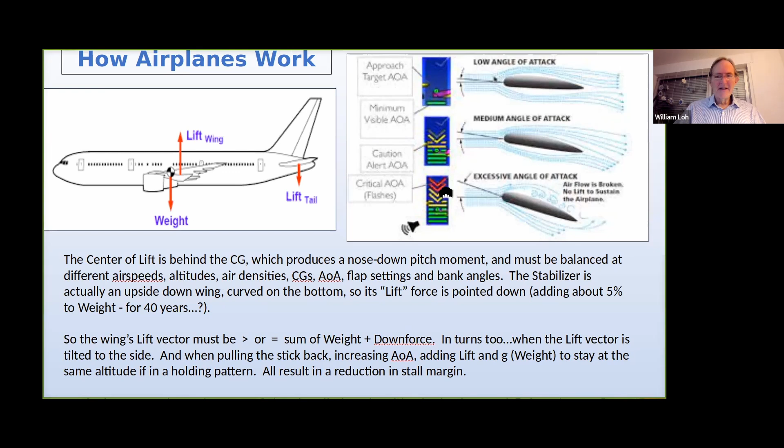So here, you can see this is a 787. You can see the angle of the stabilizer. So the leading edge is down compared to the back edge, the trailing edge. So that means it has a negative angle of attack. And that means this lift vector is a function of that.

All airplanes hit turbulence. And if that makes the nose go down, this stabilizer downforce right here, if you imagine that airplane, so the nose goes down like that, the tail goes higher, that negative angle of attack gets bigger, and this lift vector gets bigger too, and it makes the nose go back up again, just by the design of the airplane.

Same thing, if you hit turbulence and the nose goes up, imagine that airplane again going like this, nose is up, tail is down, and it kind of squishes this lift vector because the angle of attack is less for the stabilizer and pushes the nose back down again. Also due to this situation here still. And that's why they do that.

You know, they could have the center of lift be right above the center of gravity. But this imbalance here makes the airplane more stable. And that's why they have the stabilizer too. So this stuff happens all by itself. It's called passive dynamic longitudinal stability. This is the longitudinal axis. Passive means the pilots are just sitting up there. They don't have to do anything.

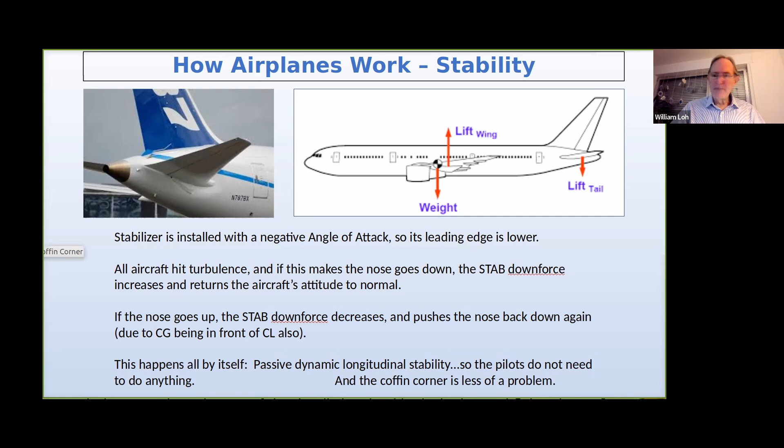Here it is. Can you see that good? Mine's, yeah, a little bit off on top here. Is that okay? Oh yeah, it is a little bit cut off on top, but yeah, the rest. Sorry about that. All good.

So the last time you went on an airplane and you were halfway through the flight, that means you're at your cruising altitude. You're just a couple of knots away from going too slow and stalling, and a couple of knots away from going too fast and overspeeding the airplane. Then it has to get inspected when you land. So it's a big deal.

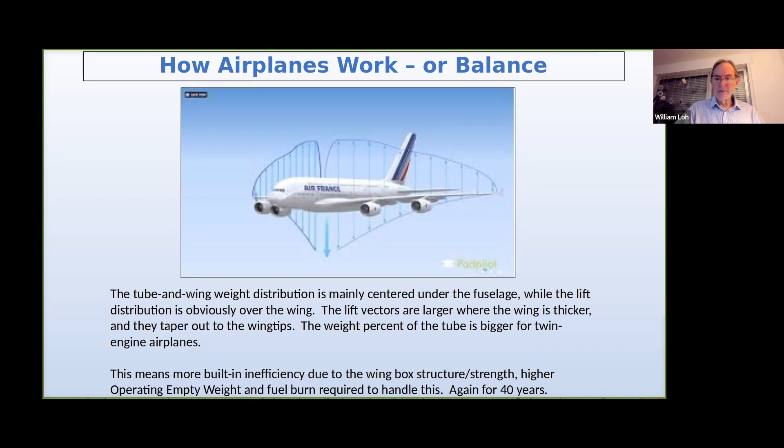This means the operating empty weight needs to be higher. And that means over 40 years, you're gonna burn a lot of fuel to carry it around.

So you can see, compared to the tube and wing airplane, because this is all composite and it is also developing lift by itself, this is a way more efficient design. And also because the airflow over the body part is accelerated, that air goes into the engines and that makes it more efficient too. So pretty cool. And the operating empty weight required to handle all this is just way less.

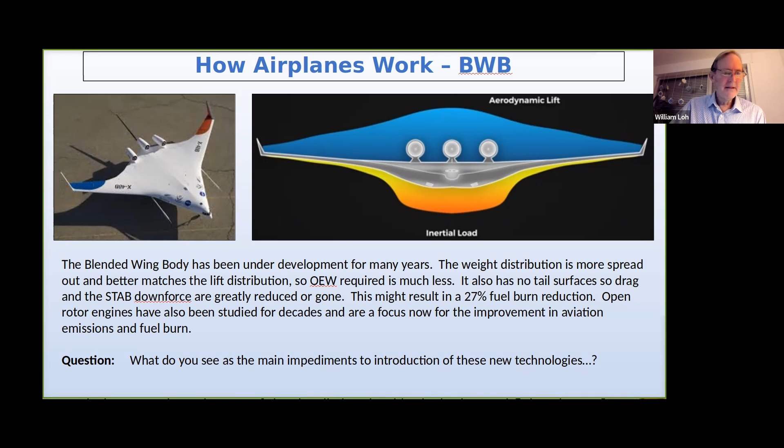But leasing has now become over 50% of the financing of airplanes. So they really are the market. They have already been the market for a long time, but now they really are. So I don't see that happening anytime soon.

And now we come to the MAX, unfortunately. Here's a fancier diagram of the wing. Here's the relative wind, angle of attack. This is the chord line that goes through the trailing edge and the very front of the wing. That's how you measure the angle of attack.

So we talked about a holding pattern and the stall margin. MCAS was allowed in the software to move the stabilizer, but based on only one angle of attack sensor. So a single point of failure in airplanes is not great for having a safe outcome. I'm still stunned by that.

Like I said, my dad flew Boeing airplanes and they did a lot better job back then in the 50s and 60s and 70s and everything. So it's pretty sad. During the testing, they decided they need this thing to move at lower altitudes because holding patterns can be, you know, below 10,000 feet.

They also changed it from 0.6 degrees to 2.7 degrees per activation. So over 4 times more. And in the MAX, if you're at neutral stabilizer trim and this thing activates twice, that is full nose down, which is crazy. I have no idea what they were thinking.

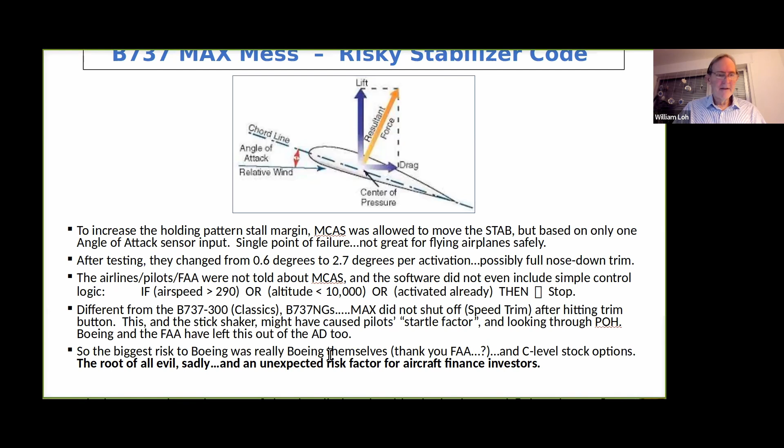And I say here, C-level stock options, the root of all evil. This is where this all came from. These guys needed to make money for themselves and their company and buy Boeing shares again. So this is something that I guarantee no bank and no lessor and no insurance company and no finance company and none of their analysts saw coming, that Boeing and the FAA could somehow let this sort of thing happen. I still can't believe it myself.

Here is the MAX. So this is the cockpit, and this square here is down here again. The trim button is over here. It's on the left side for the captain, on the right side for the co-pilot, and it is cool. You push the top to put the nose down, you push the bottom of it to trim the nose up.

This is the flap handle, speed brake, throttles, and this white stripe here. Oh wait, sorry, it's over here. This is the trim wheel for the stabilizer. It's got a little handle that pops out, and you can rotate that unless it's jammed already. So they relied on the pilots to switch off MCAS with these two buttons right here, and then turn the wheel. But that didn't work, obviously.

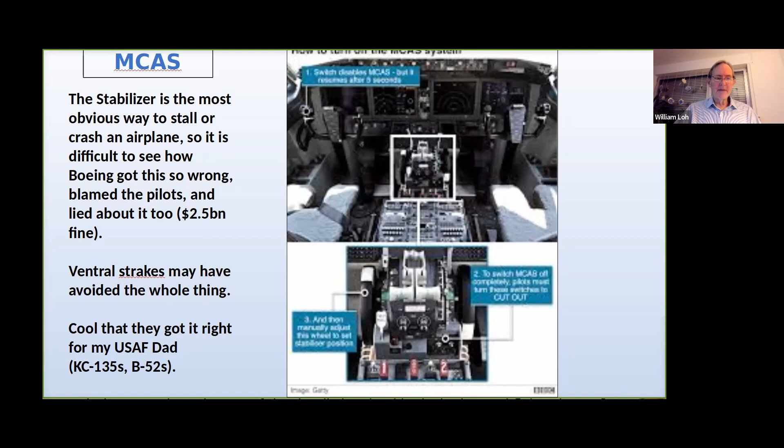And still amazing, they blamed the pilots and lied about things over a long time on TV, and they got fined $2.5 billion for fraud, plus a bunch of other things. Cool that they got it right for my dad, because I might not be sitting here right now. And sadly, ventral strakes may have avoided the whole thing. I bet you never heard of that before. Here's a bunch of them.

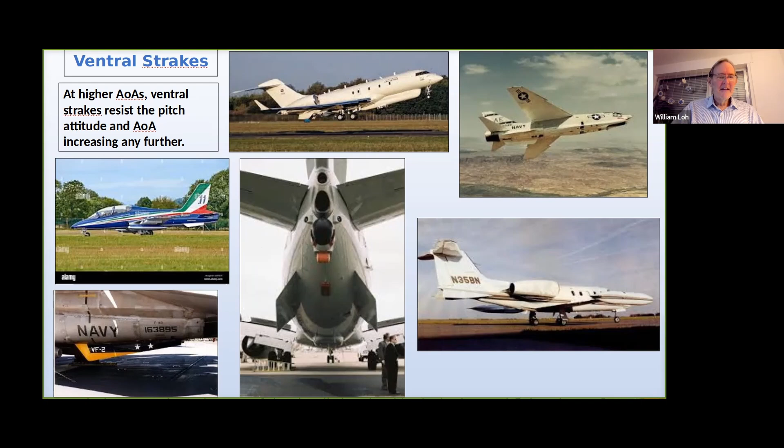And let's see, I can't get that last one to pop up here. There we go. So I wanted to show you, let me see if this is going to work here.

Yep. This is done in Python in a Django environment on a server. It took a long time to do this. It wasn't easy. And it's based on a very cool idea that I can't talk much about, but I can show you how it works. Let's do 2021. And year 7. We'll make this lower so it doesn't take as long. But it's based on simulation, which is the only way to have taken into account what's happened in the last 2 years here.

Nobody saw that coming, this whole pandemic thing where the entire world is going to get together and try to kill aviation. I mean, seriously, I never would have expected this, and no one else did either. I guarantee there are some people who have financed airplanes for a long time, and now they're wondering why they ever did that. When you hear power by the hour, I guarantee you the people I used to work with at the bank, the credit committee people, first time they heard about that would have been the last time they financed an airplane. Power by the hour. Think about that for a second.

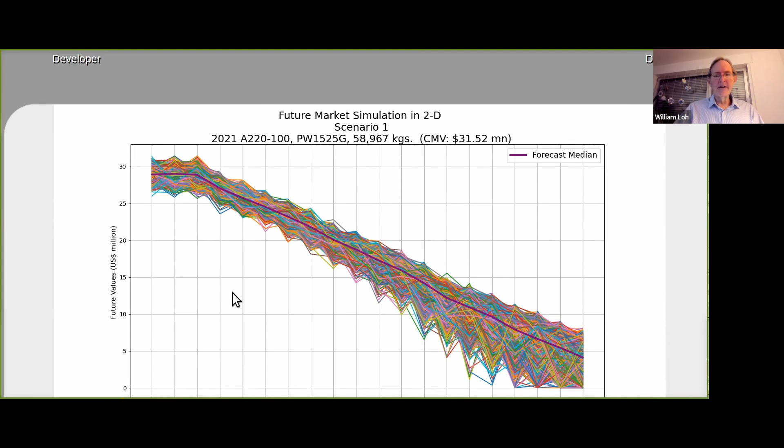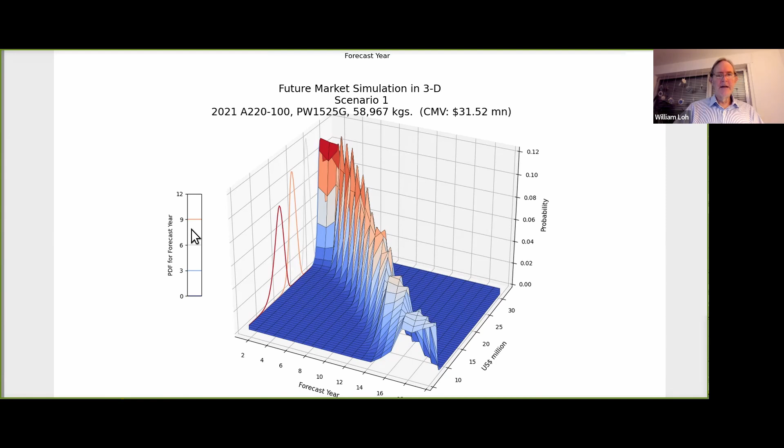And this is all of the 20 future forecast years. And you can see it is more populated here on the left because the useful life is what drives that. And we're not really sure about the useful life in 2035 and all these other years. So you can see here, it looks kind of more normal because we're pretty close to that. We can be pretty confident about the useful life in here. But as you go through time, it gets less certain.

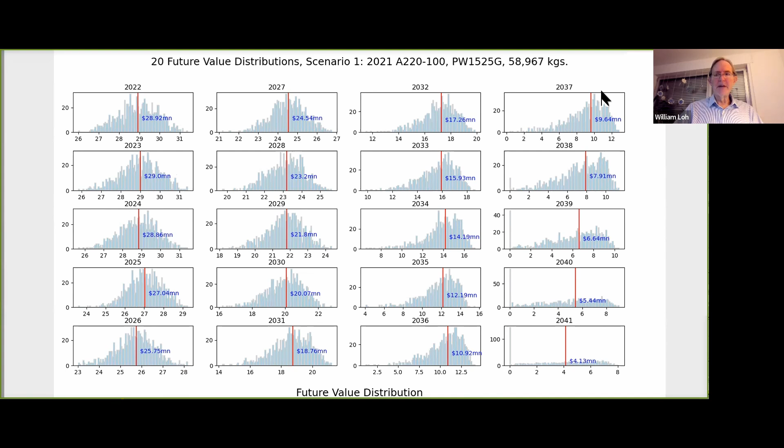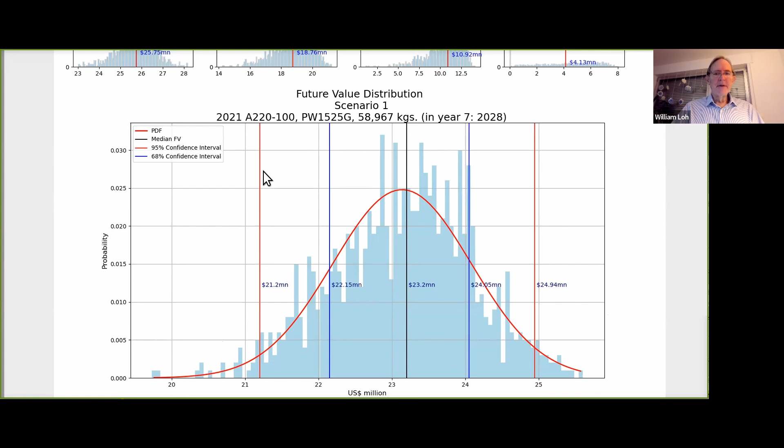And this is the median value here. Also, thank you to Python because it was so simple to do that. This is year 7. And you can select any year on the previous page. But you can see year 7 up here too. And these are lease rates here.

This is interesting because the lease rate factor, I bet you know what that is, is simulated too as the simulation runs. So it takes into account the kind of market reality that we're not sure what that number is either. So anytime you're not sure, you can use simulation to get closer to the right answer. And you can see this one looks a lot different from the values, and it's more uneven. But we've looked at that a lot. We're pretty confident that that is a realistic kind of view to take over time.

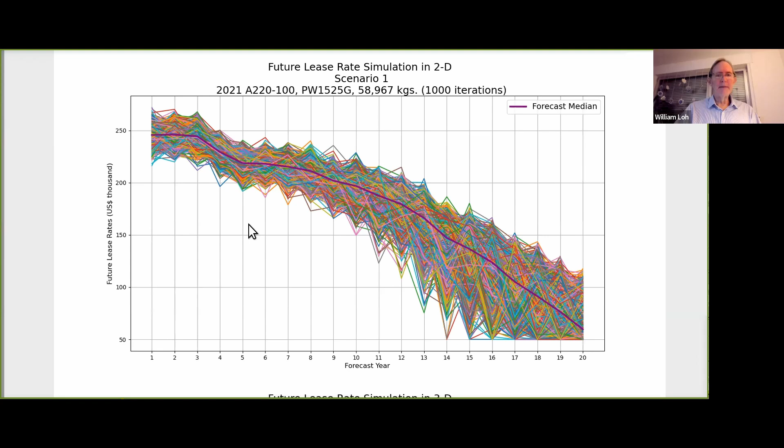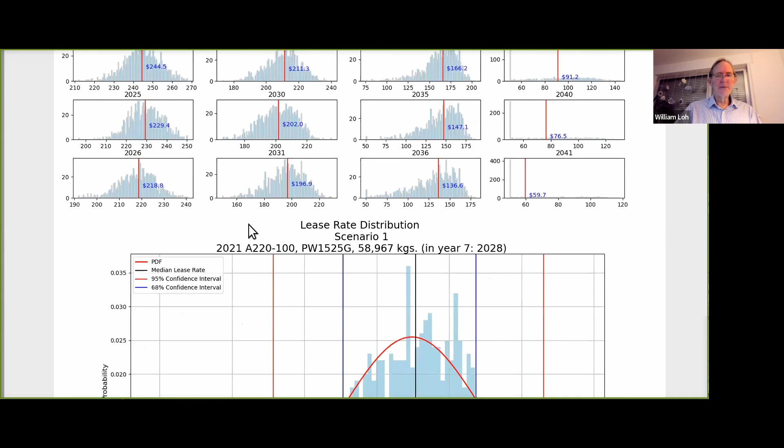And here's the 3D picture for lease rates. Looks cool too. And the 20 future ones and the year 7 one. It's all pretty similar. And the input bubble reproduces itself again after you've run that. So if you want to change anything, you just change it right there and go for it.

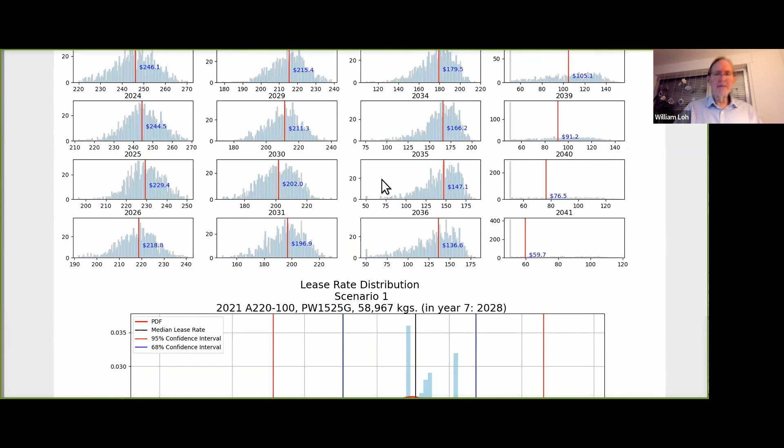And let's look at the other model. We got like 9 minutes left. Let's look at the other model real quick. We also have, let me show you this real quick, what we are doing and what people are very interested in, because the airline risk is the primary one. If you own the airplane, you don't really care what the value is until the airline gets a little bit sideways. Then you start worrying about it. Oh, wait a minute, let me change this real quick.

So we're talking with some people in Frankfurt who have a very cool model that will save us years. But basically, we forecast a credit score using the same model, the same logic for the aircraft future value. So in this case, we're forecasting a credit score of an airline. And because of the way the model is set up, it was very easy to do this as well. And we're thinking about other applications too.

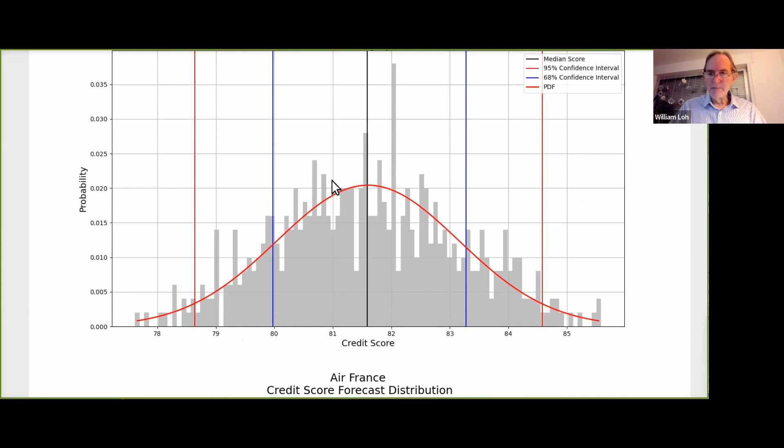But these people in Frankfurt, their model for a big airline, say like Lufthansa, they look out about a year in the future. For somebody like Ryanair, because they change their schedule more often, and the output of their model is a function of their schedule, for Ryanair we could do like a 6-month view into the future. Nobody else has one of those. So this could be very interesting. It's not done yet. And in this case, we say 2023. We'll be updating this here just to do 1 year probably. Because even having a 1 year kind of warning system is a good thing compared to having nothing.

And let's look at this model real quick. This is a lease IRR model, and it's dynamic. So first I had this done in Excel, and it took 2 years to get it right. I had accountants helping me. I had a guy who's former CFO of a big leasing company in Asia. Took forever. It was a huge deal. It was like climbing a mountain. And I mean, I'm good at code. I'm good at Excel. They had other people try this and fail. They couldn't do it. But they said, okay, well, let's let Bill have a go, you know? And I did it, and I got it done.

And then we bumped into the limits of Excel. I wanted to use simulation in here too. And Excel takes forever, and it's just not as good. Python is set up for it. And they have modules and packages set up you can just use, and it takes 20 minutes. It's amazing how cool Python is. It's a little bit slower because it's built on top of C++. C++ is very fast, but this interface is a big deal and takes a while, I guess. But you can see all the parameters here. So I won't waste time with that because we're getting down to being done. But it's all the standard things, nothing new on here.

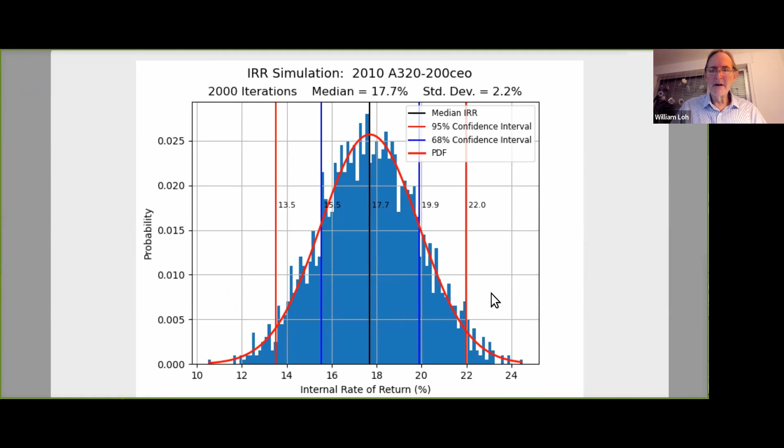And I've never seen one of these. All the lessors I've talked to don't have this either, which I was stunned about because, you know, simulation is about as simple as it gets. You should read about how you do this in the code. Every computer has a random number generator, and that's what we're using here. It's called the Mersenne twister algorithm. Same one that Excel uses, really.

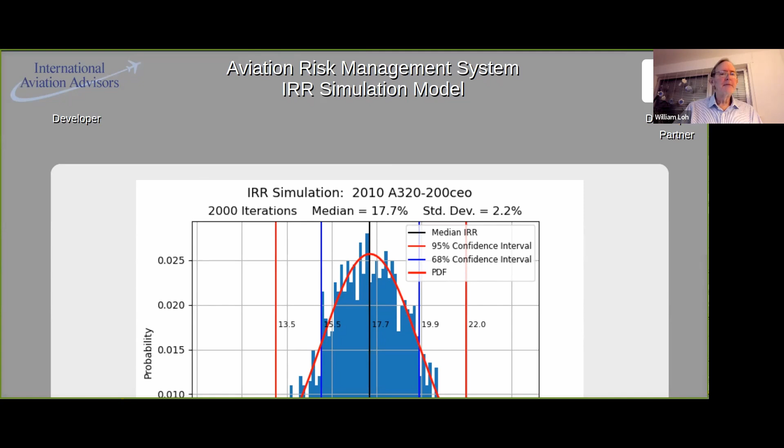This IRR simulation is really, let me show you, let me back up one here. Is this the same one? Yes, so you can see the range values here. Sale price simulation range, upper limit and lower limit. So you can go through all the parameters and set up this range analytically too, so it's reasonable again, based on reasons. The lease rate too. So you go through the whole thing and set up the ranges so it makes sense. These are just typed in, just off the initial value off the form in Python.

Then at the end, the answer has more value to you and your risk approving people. You know, the lessors have credit committees too. They look at every deal and they try to get the numbers right. That's the whole point here, to help people make money and not break the company.

Like I saw my former people, these people I thought were smart. On paper, they looked like $2.5 million, but they could not have been more stupid, which is a shock still to me. This is years ago. I still can't, and I talked to Andrew. Andrew knows about all this. He was involved in it too at the time, and worked together with them too sometimes.